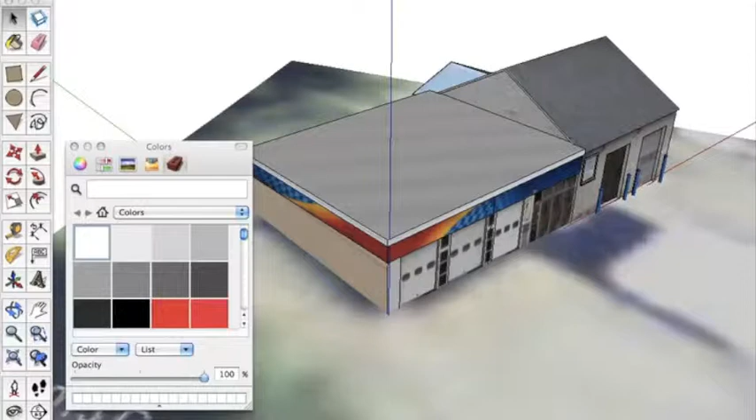Hello, my name is Evan Brown, and today I'll be teaching you in this tutorial about how to prepare your buildings for 3D printing on the MakerBot.

The first thing you should do to your model is delete the terrain that you've imported from Google Earth. To do this, right-click and then press Unlock. That will turn the terrain from red to blue. Then you can just use the Delete button.

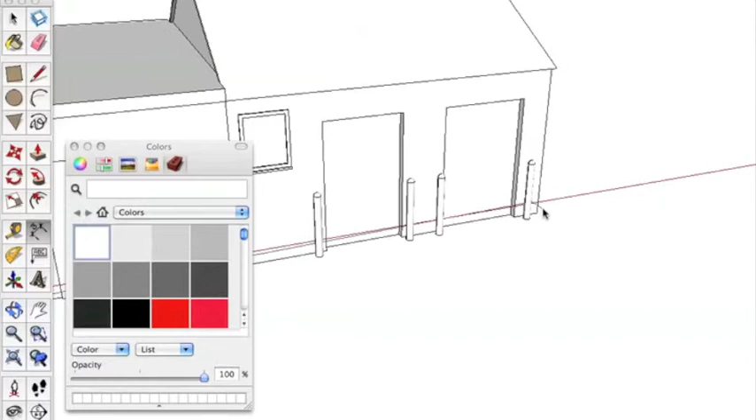Next, use the Dimensions tool, located on the large tool set, to add dimensions to your model. This will give you a real-time measurement of your model and will be helpful in the scaling process to make sure that your model will actually fit on the build plate and be able to be printed.

Next, use the Scale tool, found by the shortcut S, to scale down your model to a smaller size. While you're scaling, look at the dimensions of your model to approximate how big it will actually print.

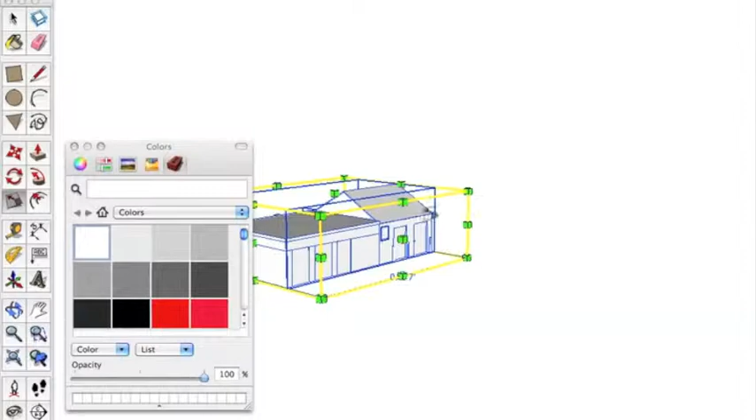Once you find the appropriate size for your model and you're happy with it, you should move it back to the origin. As you can see, it's been moved off into space somewhere. Now, for class, you may be using a defined scale, or you may just go with what looks good and what you think will print in a reasonable manner. So just grab one corner of your building, then zoom out and move it back to the origin.

So now zoom into your building and take a look at it. We're going to examine these posts. These posts are very small. They're not going to print very well on the printer due to their small size and the fact that they're not even attached to the building.

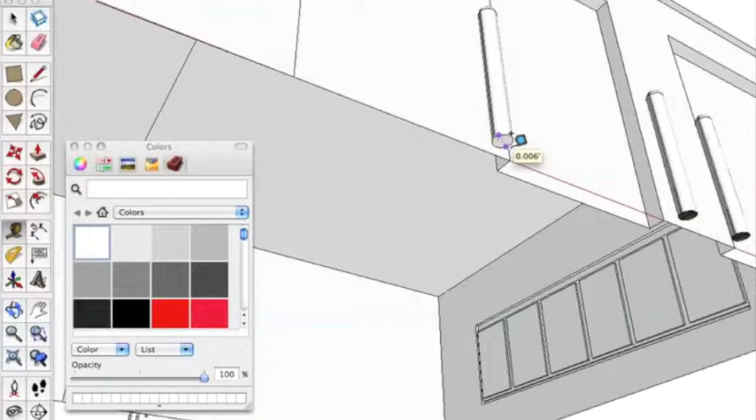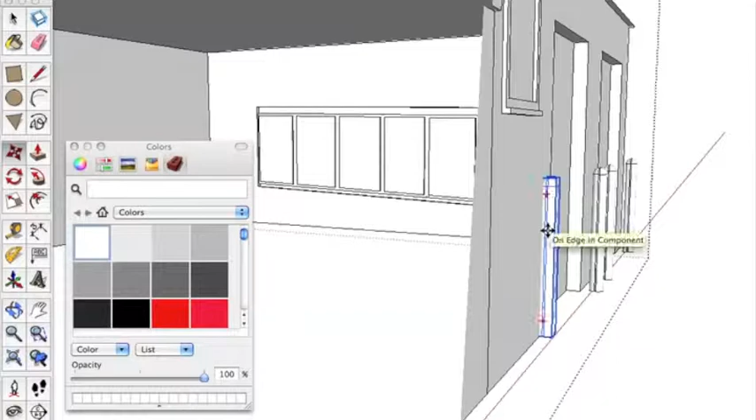So we could either get around this by just deleting them, or we could try to make it so that they're there, but attached to the building. In this case, my posts are components, and I'm just going to move them slightly in towards the building. This will give the appearance of posts once the building is printed, but they won't be separate from the building, so it will be a lot more stable.

Now that we've fixed all 4 posts, we're going to look around the rest of the building to see if there are any other problems that might arise.

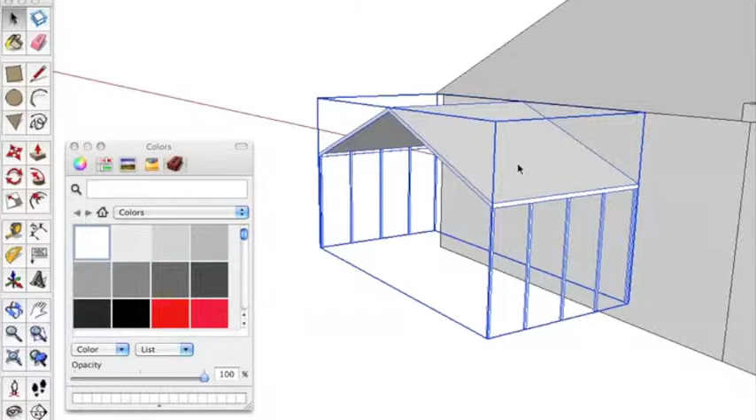The first thing I see is that there's a tent that comes out from this building. If we measure the posts holding up this tent, they are extremely thin. Those won't even begin to print on the printer. The roof is also very thin. You could spend time editing this tent to make it thicker, but that wouldn't look very good on the building, and this structure isn't key to the appearance of the building, so you can just delete it.

Next, you should consider overhangs. If overhangs are too large, they won't print because the printer will be trying to print something in midair if there's no support for it. Now this is a very thin overhang, so it will probably print very well.

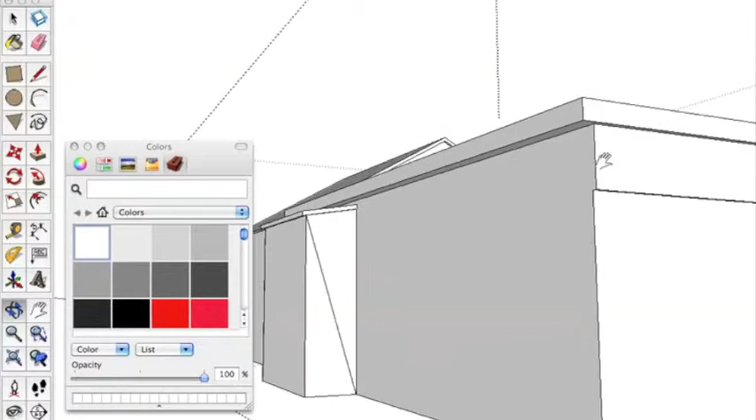So do this all around your building. You may find that you might have to either shrink some overhangs or possibly delete them entirely, although that's unlikely. Here we're going to measure another overhang. This one is also very small, so it will likely print okay.

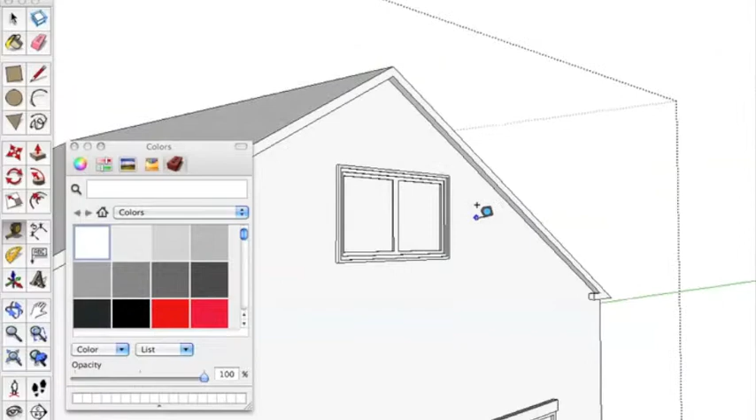This building is similar to most buildings that you will encounter in your modeling career. However, there are some buildings that are irregularly shaped and have more complex structures that will be more difficult to prepare for printing. Here we have a set of gas pumps.

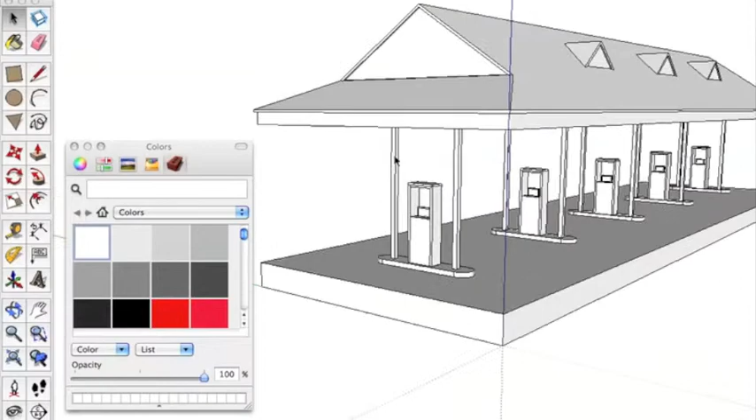This model will not print as is, because the roof will try to be printed in midair by the printer. The way to get around this is to actually print the model in 2 separate pieces and then glue them together later.

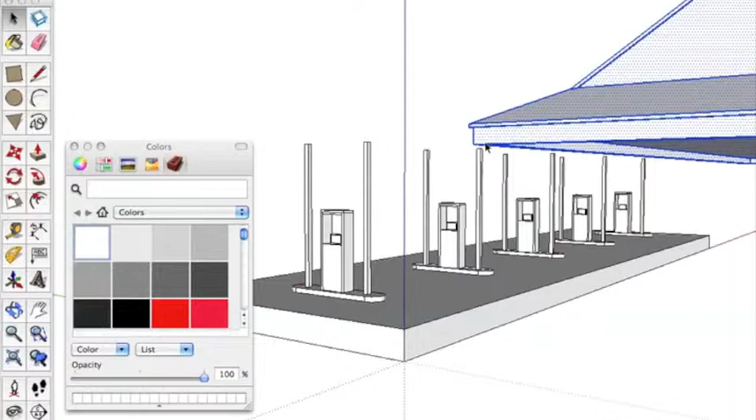So what you should do is select the roof and move it off to the side. Now it's important, if you're printing a model in more than one piece, that each of the individual pieces are on the same plane. So select the bottom corner of the roof and match it so it's on the same level as the bottom corner of the base plate. The roof is also recessed slightly, so we should push-pull that down so it's on the same plane.

This model is now ready for printing. Before you print your model, you have to convert the SketchUp file of your model to an STL file. This will allow you to import it into the MakerWare software, which will allow you to print your model using the MakerBot.

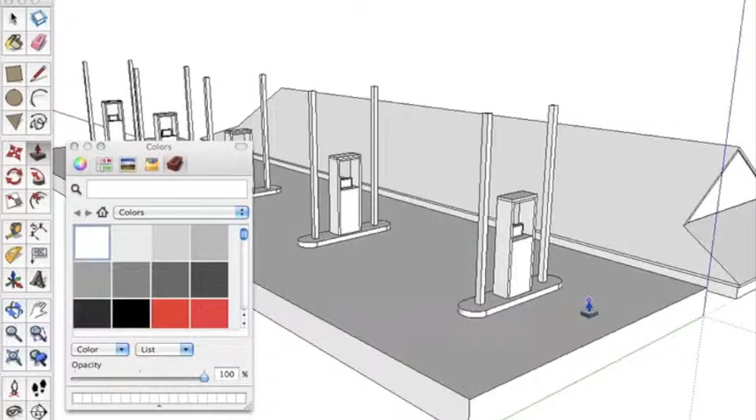So now I'm going to go back and use the original building. You should just take another look around your building to make sure that everything is okay and that you haven't missed something. To convert your SketchUp file to an STL file, you're going to use the Export STL plugin for SketchUp. If you don't have this, I suggest downloading it.

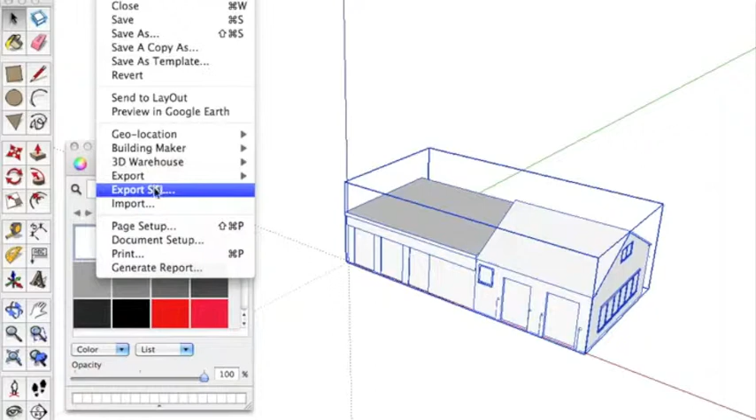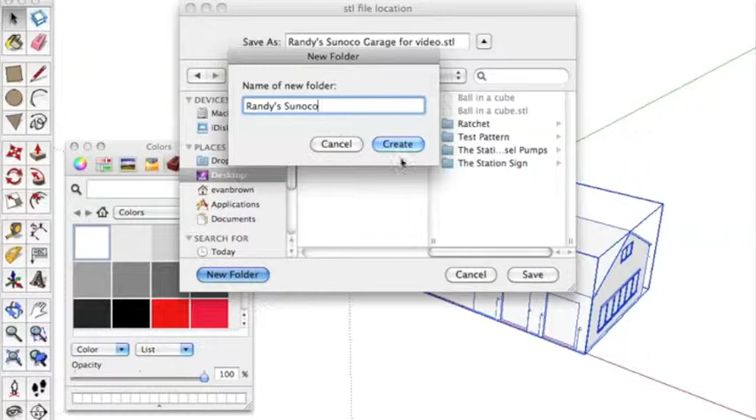First, select your entire building. Then click File, Export STL. This will pop up a window that will allow you to save your STL file in a specific place on your computer. Now click Create and Save. A second window will then pop up once you click Save. Just click OK to that too.

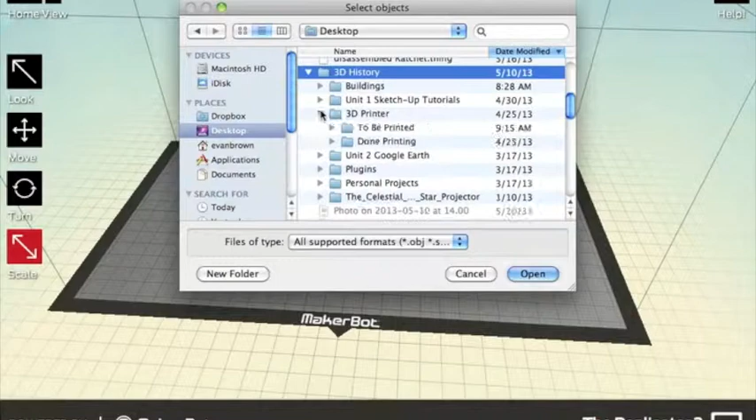Now open the MakerWare software and then click Add. This will pop up a window that will allow you to select the STL file that you just saved from SketchUp. When you find your file, click Open. And then click Yes that you want to put it on the platform. Select the object that you've just put in, and then use the Turn tool to turn your building so that it will fit onto the build plate.

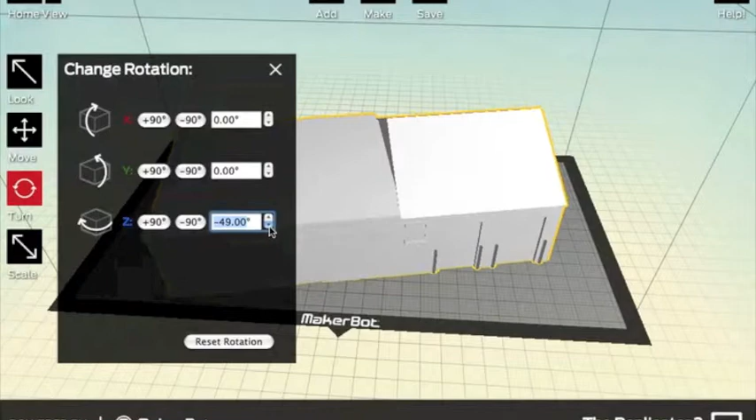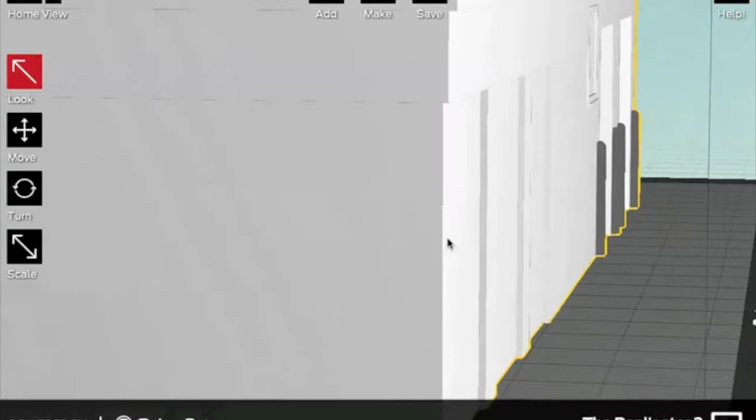Now take a look around your building. Any surfaces that are dark gray or black will not print. As you can see here on this building, the posts that we worked on earlier are black. That means they won't print. This is not because they're too small. It's because their faces in SketchUp are not facing the correct direction.

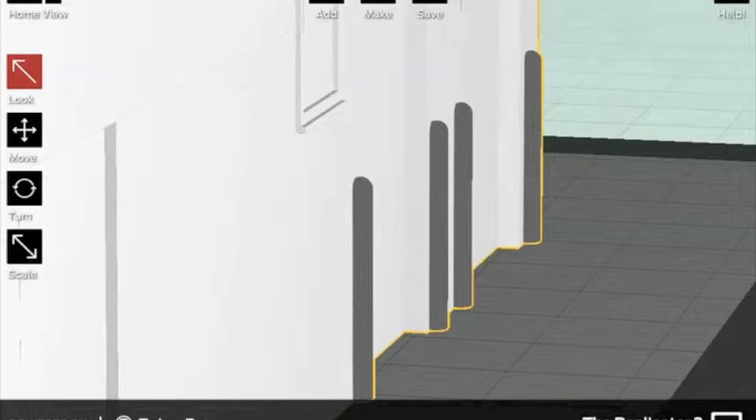In SketchUp, faces are either white or purple. Once you've photo textured, you can no longer see this, so you'll just have to experiment. We're going to have to go back into SketchUp to fix this.

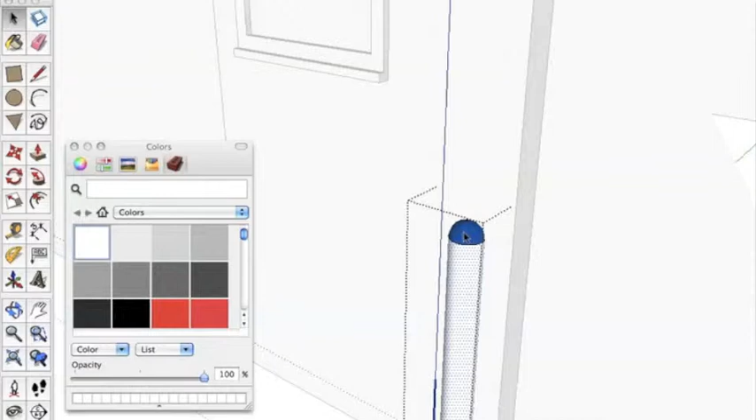In SketchUp, find the problem area. In this case, it was our posts. Then right-click and click Reverse Faces. Then right-click again and click Orient Faces. The Orient Faces command will orient all adjacent faces in the same direction as the one you just reversed. Since these are components, it has fixed all 4 in 1.

Now, reselect your model and click File, Export STL again, and resave your file. This will now be the updated file, which will hopefully be free of problems.

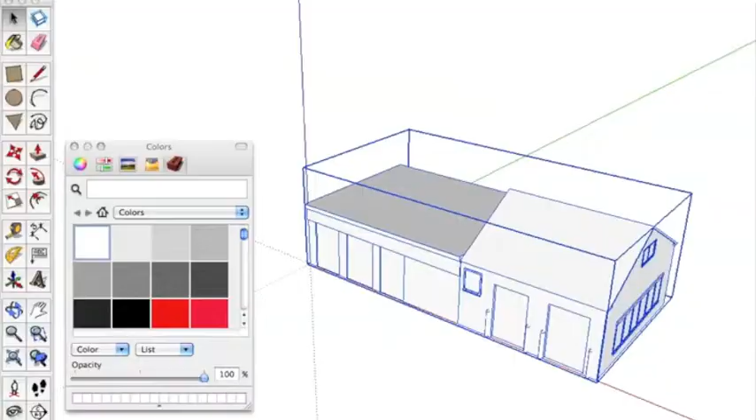Once you've exported your file, go back to MakerWare and delete your old building off of the build plate. Then click Add to add your updated building to the MakerWare software. Once again, you should select your building, go to Turn, and then rotate your building around the Z-axis until it fits on the build plate.

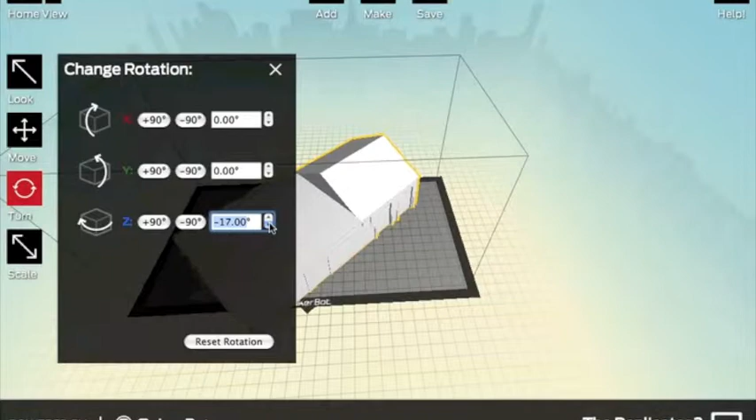Once you've done this, you should re-inspect your building to make sure that all of the areas of black or gray are gone. Some areas will appear darker than others, but once you rotate around, they will become white. This is just due to the shadowing in the MakerWare software.

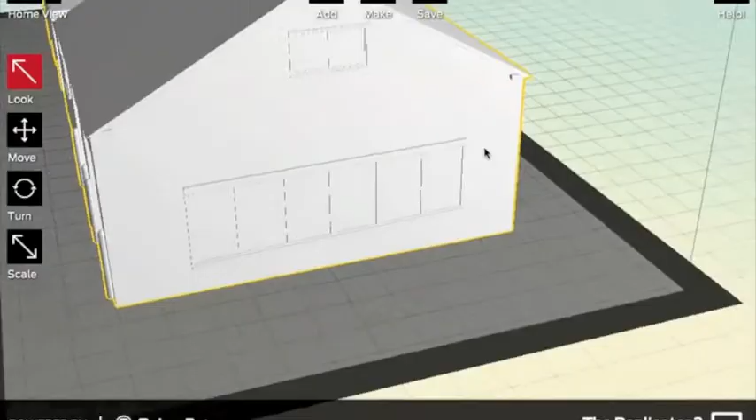Now you're ready to print. Connect the MakerBot to your computer through the USB port. You will then see a window pop up and just say Cancel. It will now give you a message that it's been connected to the printer. To make the model, just click Make.

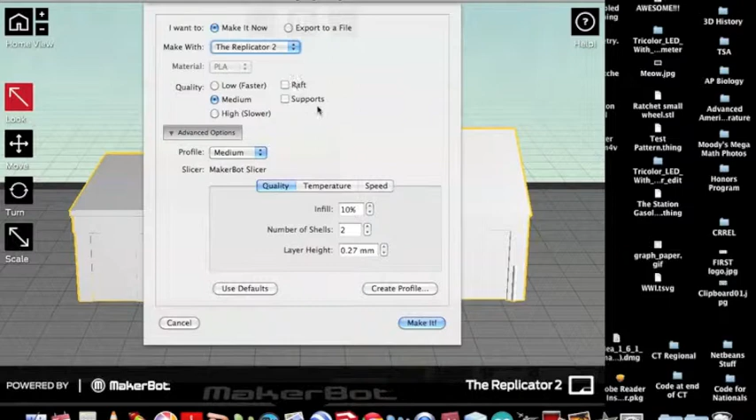Then you should check the box that says Medium. You don't need any advanced settings at this time. Then just click Make It. You'll see that the computer program goes through slicing, and that's just making the model into thin layers so it can talk to the printer. This may take a while depending on the quality that you choose or the size of your building.

Once this is complete, your model will begin to print. The printer will go over your model's surfaces in thin layers, slowly building it up. This may take anywhere from a couple minutes to a couple hours, depending on the size and complexity of your model. Rather than connecting the printer to a USB port, you can also load your .stl or .thing file onto an SD card, and then put that into the printer, and then choose Print from SD. This will also give you the same result.

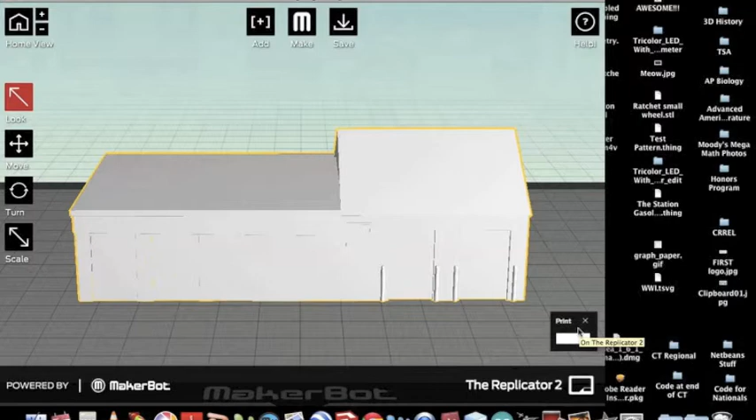After your model is finished printing, you should take it off the build plate. This might be somewhat difficult, and it tends to stick, so you might have to work at it for a while. Thank you for listening, and happy printing!